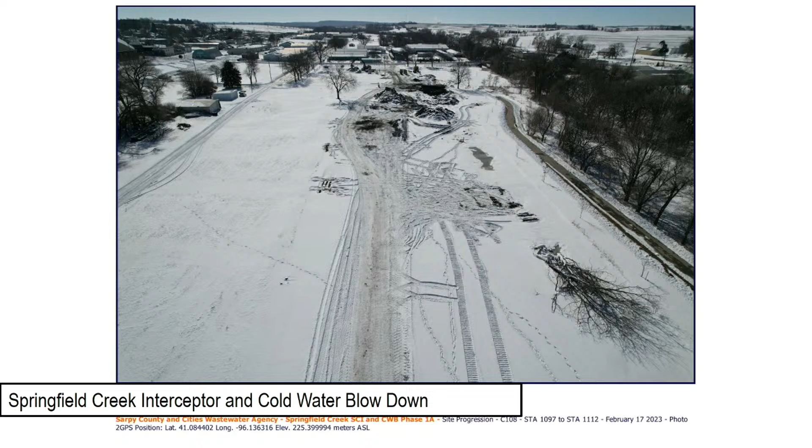As we move south, this is south of the buildings in the fairground.

The construction here isn't necessarily complete. They have some of the line work in, but they're working from the wastewater treatment plant facility north to try to make a connection where 2 crews will tie in at roughly this location at the tractor pull area at the Sarpy County Fairgrounds.

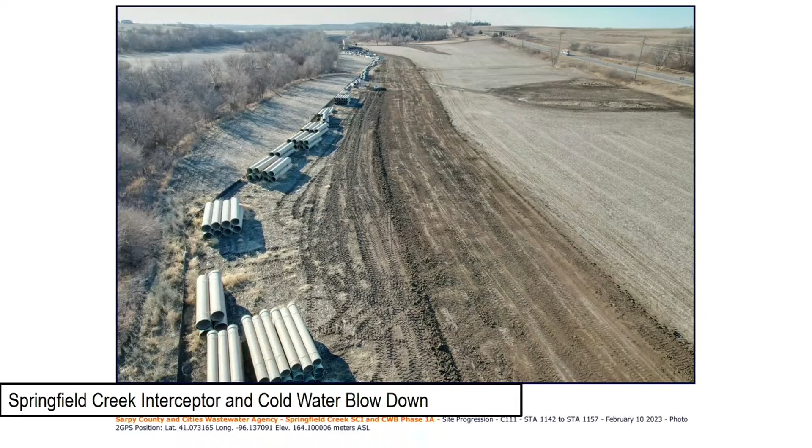This is at Flug Road, looking south towards the wastewater treatment plant facility. These photos are as you work your way south towards the facility in the City of Springfield. The tub or tank, the earthen tank I talked about a little bit ago, is that big bowl or dish shape.

This area right here is the equalization basin. It's roughly 8 to 10 feet deep, and that will hold the cold water discharge before it ultimately, the cold water blowdown line discharge, until it cools enough that we can actually discharge it to the creek.

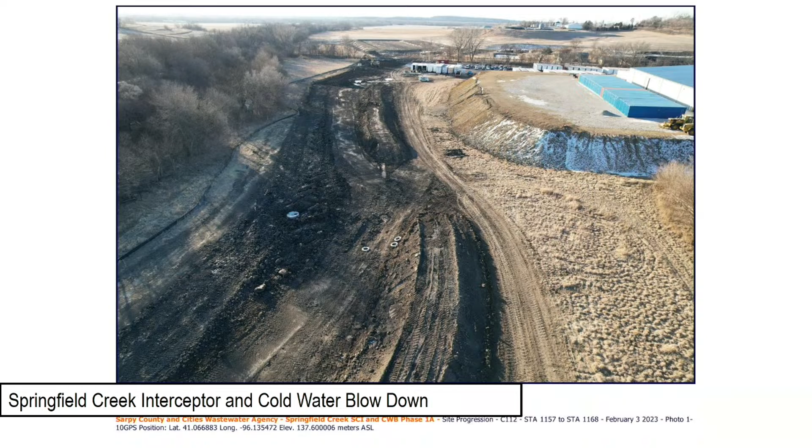Moving on from segment 1, looking at Zwiebel Creek subbasin, and then the lift station property. What you see here on the right-hand side of the page is the actual lift station site that this application is referencing. The wet well has been cast in place, and several of the manholes, vaults, and meter structures have been installed as well.

Just rotating around the site a little bit to give you some perspective of the size and scope of the project when we get to the site plan references a little bit later. This just rotates you around from south to north of the lift station site.

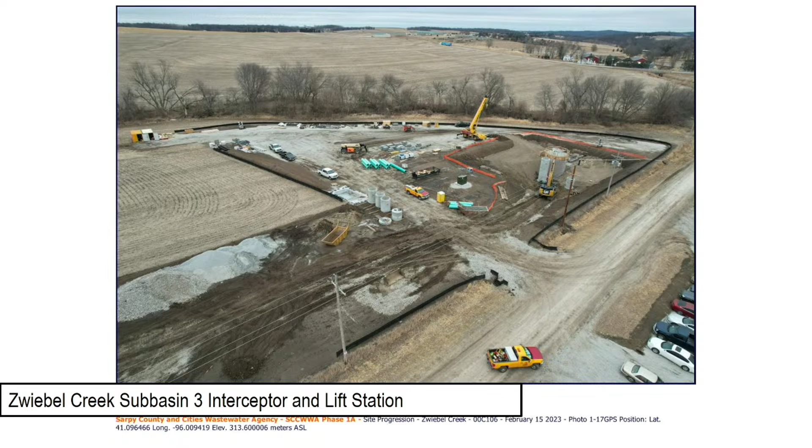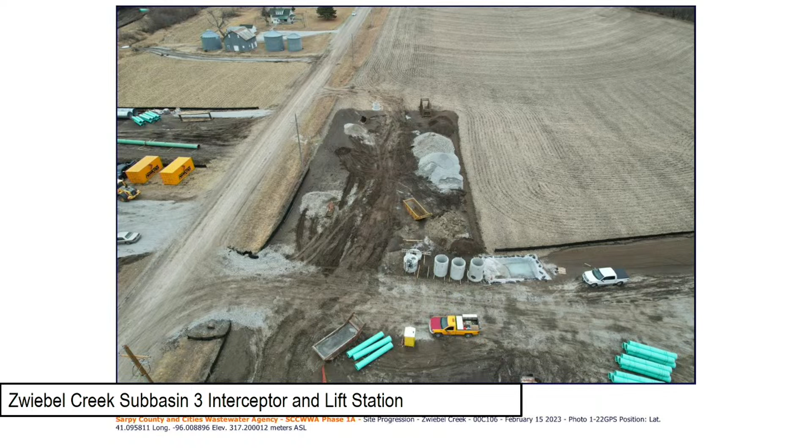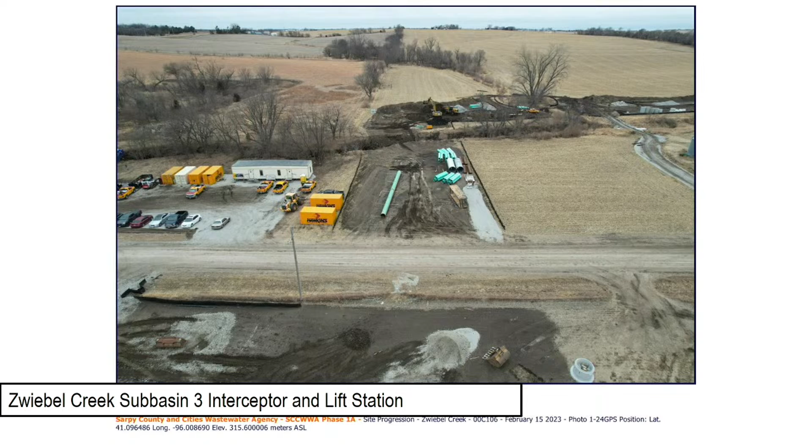If we start chasing the alignment from there, this is basically sitting right over the top of the wet well at the lift station, looking straight north, due north, with 63rd Street on the left-hand side of the page. We're moving north and then pointing straight west towards an alignment change. Once we get across the creek, we start heading due north again, continuing that gravity line all the way up that watershed, parallel to the existing creek line that runs through there.

Most of the sewer line from basically this driveway all the way up to 72nd Street is installed. It's been tested and has passed the testing. They're working back, 2 crews, one working south, one working north and west, to meet up and conjoin there.

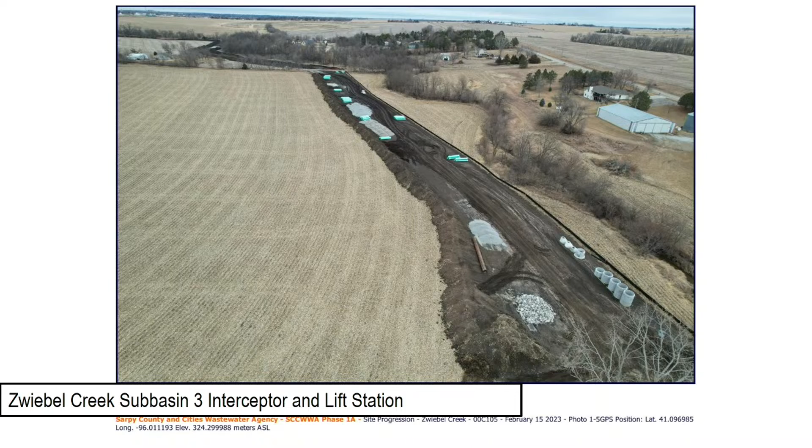Moving on to segment 3 and 4. The eastern portion of the project is what we're calling Zwiebel Creek, segment 3 and segment 4, trying to get that all complete by the end of 2023 and in service so that the development being planned in Papillion would be able to potentially utilize that sooner rather than later.

So just some photos going through segment 3. This intersection is Highway 34 and Harlan Lewis Road. The Omaha wastewater treatment plant facility is actually located in the background here. West Papio Creek is where we would tie in, just on the other side of the creek.

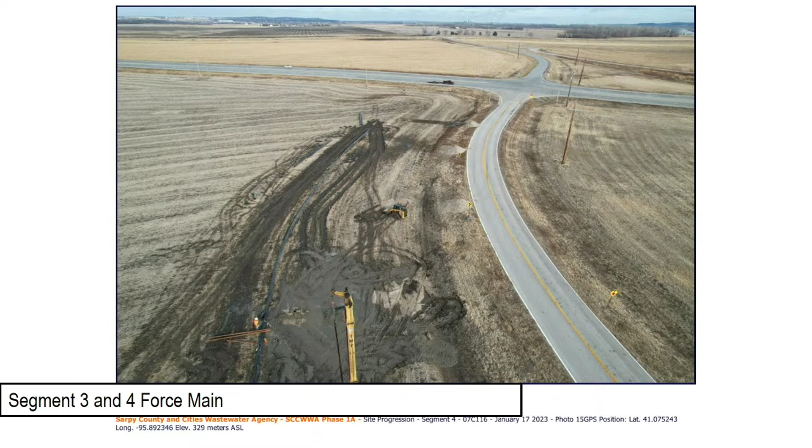What you're seeing here is a lot of dewatering wells that have been installed. This is down in a really low-lying area along the Missouri River with a lot of high groundwater, and that needs to be drawn down in order to expedite construction.

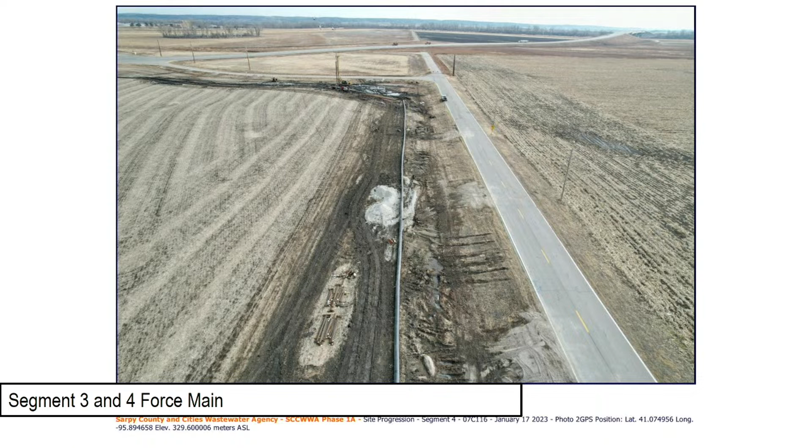This is La Platte Road looking basically straight east. Really what you're seeing here is just the installation of some of those dewatering wells. They haven't started the physical pipe construction here. They do have pipes strung out, and they're starting to fuse some of it, but they haven't started the actual digging and installation of that system yet.

Highway 75 and Highway 34, with 34 in the background here and 75 going north. You can see all the pipe that they have laid out and strung at basically Pinecrest Drive along 10th Street. That pipe will ultimately extend and be bored under the highway, basically paralleling La Platte Road all the way down to Harlan Lewis and then north.

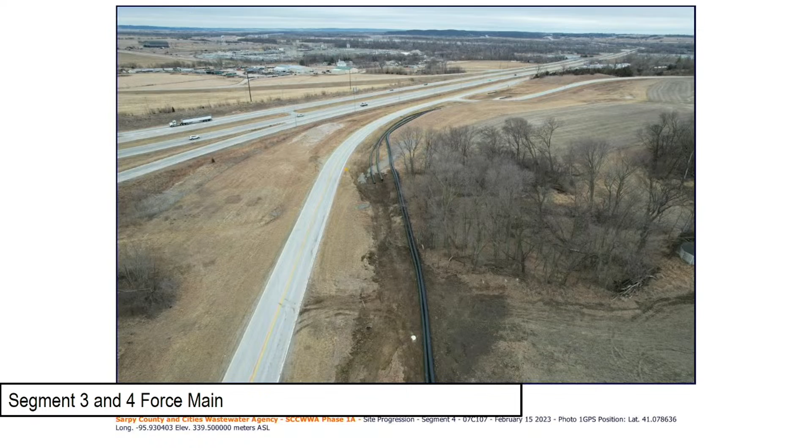From this location, it heads pretty much due north, and you can see the amount of pipe they've got strung out and fused together. They are digging and installing some of that as they go. This is the intersection at Hidden Valley, or Platteview Road more or less, and 10th Street, looking straight south.

This is looking due east on Platteview Road. The intersection of 10th Street and Platteview Road is right here, or Hidden Valley, I guess is what it's technically called.

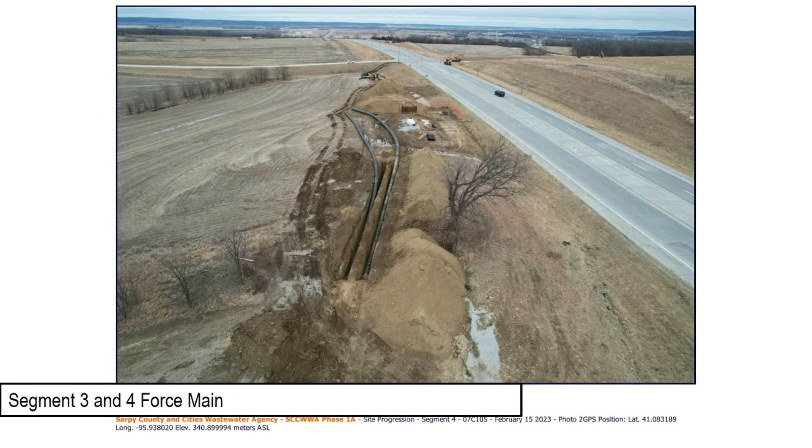You can see the pipe and the installation of that pipe basically stopping right here for the time being. They have everything from about 40th Street, 42nd Street installed all the way up to this point currently, and they're continuing to work down 10th Street and then down the Platte. This just shows some of the pipe that was strung out along the Platteview Road around 42nd Street.

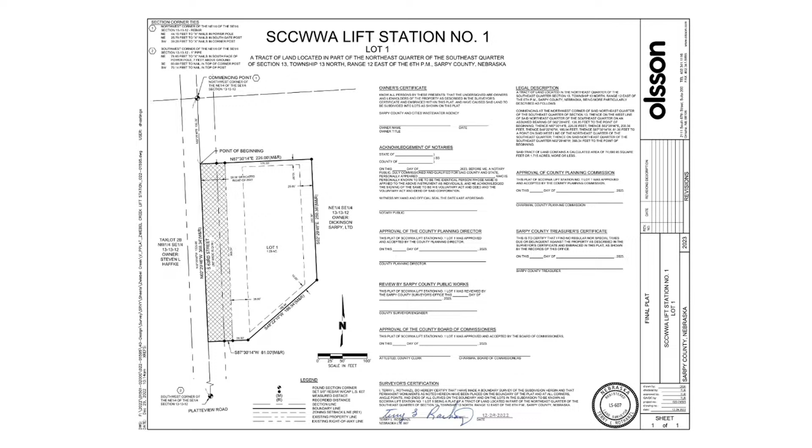To get into the nuts and bolts of why we're here today, the Sarpy County and Cities Wastewater Agency did buy and fee simple title a couple tracts for the lift station locations in order to be diligent and require of ourselves what we would expect of the development community. We approached the planning department to plat this property, change the zone in accordance with the comprehensive plan, and follow all the rules and regulations, pay all the ASIP fees and all the fees associated with that. So this is the location at Zweibel Creek, the 63rd and Platteview Road location.

Everybody always asks, what are we going to see out here? What you're seeing right now, obviously, is exposed concrete foundations of the wet wells, but that will all be underground once they get things backfilled. The structure here is the wet well below grade. The manholes are all below grade. The valve vault's below grade, as well as the distribution manhole.

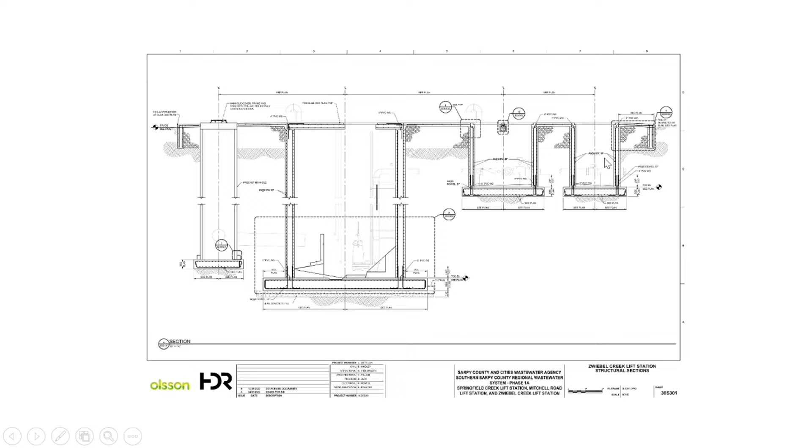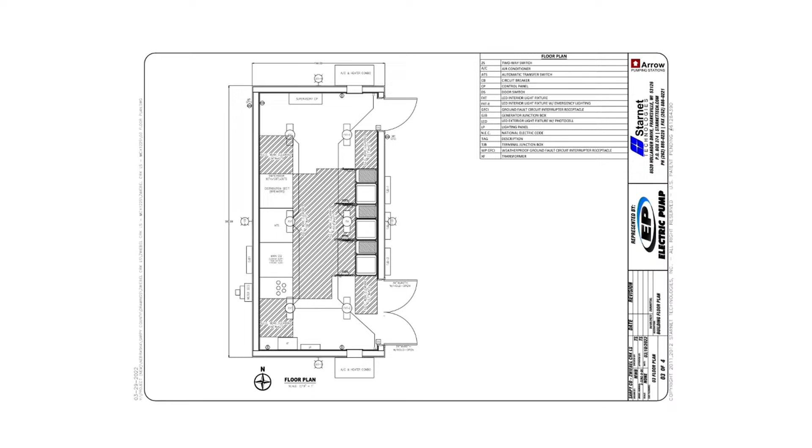That is basically the footprint of the electrical building. It's all prefabricated in a controlled environment, fully tested. The electronics and electrical systems controls are all fully tested in a controlled environment before they send it out to the site. And then once it hits the site, the contractor is responsible for building a foundation and then setting that with a crane system, and then tying the foundation to the building itself.

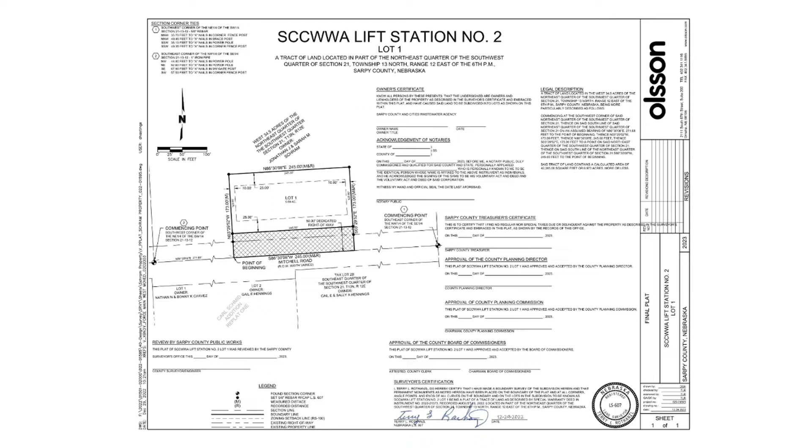So I guess with that, I'd be happy to answer any questions as it relates to this first plat application.

Thank you, Mr. Thompson. I guess why don't we go ahead and open this first application up for public hearing. Anyone here this evening have questions on this application or comments in favor or opposed? You can come forward and state your name for the record. Going once, going twice, they're just here to learn, okay? I hereby close the public hearing.

What are the wishes of the commission? We'll basically have three different motions we'll need for this application, one for the rezoning, one for the preliminary plat, one for the final plat. Again, if there's no discussion, I'd entertain a motion.

I'll make a motion then. I'd like to recommend approval, change the zoning from AG agricultural to RE1 residential estate 1 for proposed subdivision to be known as Lot 1, SCC WWA Lift Station Number 1, subject to the comments found in the staff report. Make the recommendation as the proposal is consistent with the Sarpy County Comp Plan and complies with the requirements of the Sarpy County zoning regulations.

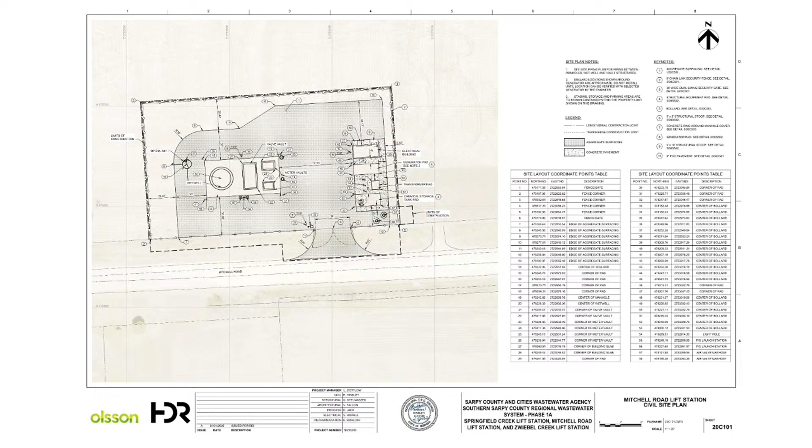Very similar layout to what you've seen before, exactly the same building materials as I showed in the previous palettes and building footprints, just a little bit different configuration of the property there. This site is not currently under construction. We're still working through a water infrastructure loan with the federal government to be able to start construction on this site. So we're trying to be ahead of the ball on this one here a little bit. With that, I'd be happy to answer any questions you might have.

Okay, thank you, Mr. Thompson. At this time, we'll open this matter for public hearing. Anyone here have questions on this application, here to testify in favor of or opposed to? Now would be the time to come forward. Seeing no one, I hereby close the public hearing. What are the wishes of the commission?

And we would also have 3 different votes we would make on this, one for rezoning, one for preliminary plat, one for final plat.

I would move to recommend approval of the change of zone from AG Agricultural Farming District to RS 100 Single Family Residential District for a proposed subdivision to be known as Lot 1, SCC WWA Lift Station Number 2, subject to the comments found in the staff report and the attachments, and I make this recommendation as the proposal is consistent with the Sarpy County Comprehensive Plan and complies with the requirements of the Sarpy County zoning regulations.

I will second. Motion by Mr. Preston, second by Ms. Cheney. Any discussion or questions? Hearing none, please vote.

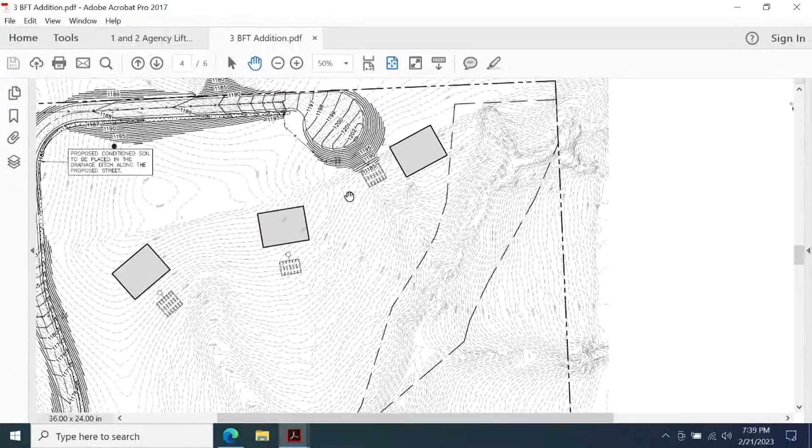Thank you. I have a quick question. The cul-de-sac length, is that all the way going up the west boundary and then turning back to the east, or just from the northwest corner back to the east? Since there's no intersecting street with it, the cul-de-sac would be the entire length of the road.

Okay, so it's all the way from the southwest corner, from Sack Road? And then you mentioned a plan for connectivity down the road. Where would that be on the map? So the most likely spot for connection - I'll use this aerial - it depends on what develops, but I'd say the most likely is probably something to the west or to the northwest to get back to 204th Street.

As you can see on this site, it drops off considerably right along this area, and it's kind of a valley in here. So it's very difficult to have any kind of road back to Sack Road within the current limits of the property. It would most likely go to the west, back to Sack Road, or to 204th Street if that develops.

So the intent would be that when the surrounding property develops, it would not be along a cul-de-sac any longer? It would - yes, it would. That's a good way to state it, yeah.

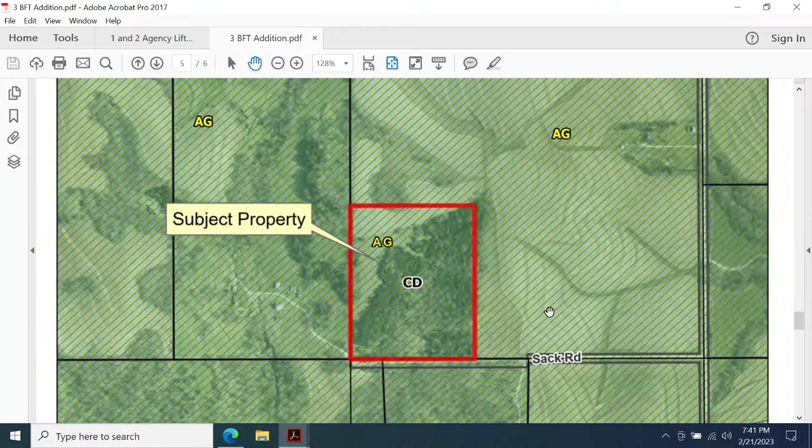One other question - I don't think that's a half-section line along the west edge of this property, is it? Is this a quarter section line, where 198th Street is? Good question, let me pull up the map here. Sorry, one second.

This would be the center section line because there's 192nd, there's 204th - that's a mile, right? Yes. So this is the property right here, and this is the southern - Sack Road is actually a section line. Okay, so 198th is the half-section line, apparently? Jason, just say yes. Yes.

198th, okay. You're talking about what would be potentially here, the west side, west edge of the plat? Yeah, it's like - yeah, okay. Yes, that'd be a half section line because that's right here.

Since we just had the Sarpy County and Cities Wastewater Agency in on the prior applications, is this also subject to paying fees for that? No, this falls outside of the growth management area for the agency. It's in the conservation development zone for our growth management areas, so that's why you have the 40% outlot for conservation development.

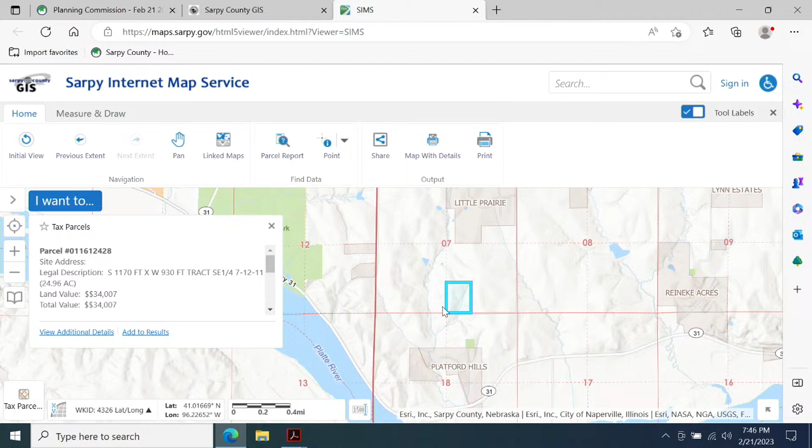Jason, can you pull up the other map for the audience and for us on our screens here? Zoom in here. Sure, try to get you. I might even throw on the... Okay, is that good? That's, yeah. And if you've got the mouse there, sir, you can probably move it around. So this is our family farm right here.

Okay, so Sack Road coming in here. I was just a little worried about that, that's my only access right there. So Sack Road kind of stops at my property. So coming in and out of there, I was just wondering where the driveway was gonna be and if there's any runoff concerns.

And where the houses would be at, I guess. Okay, because it looks like it's gonna run all along my east line, and just a little concerned with that. And with the septic, I didn't know there was gonna be septics, just a little concerned. That's my only way in and out, so.

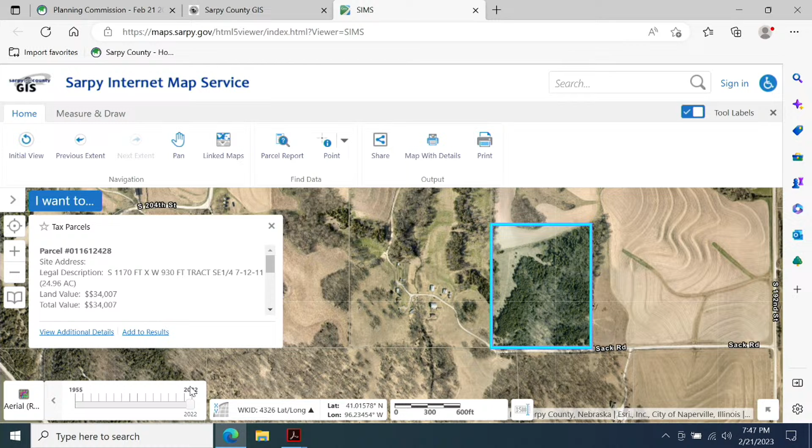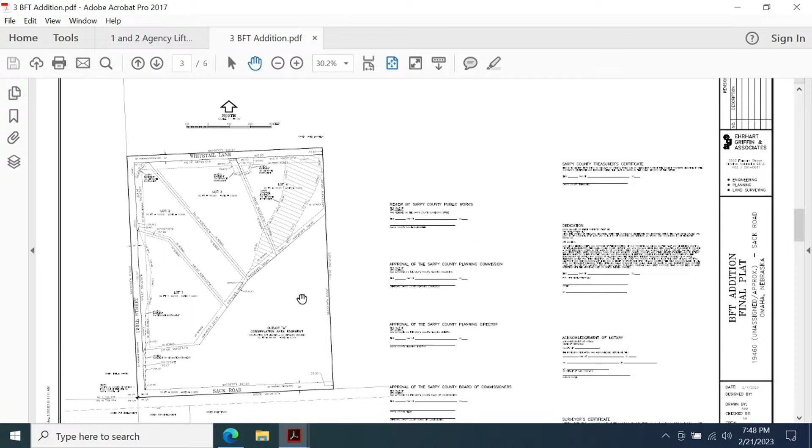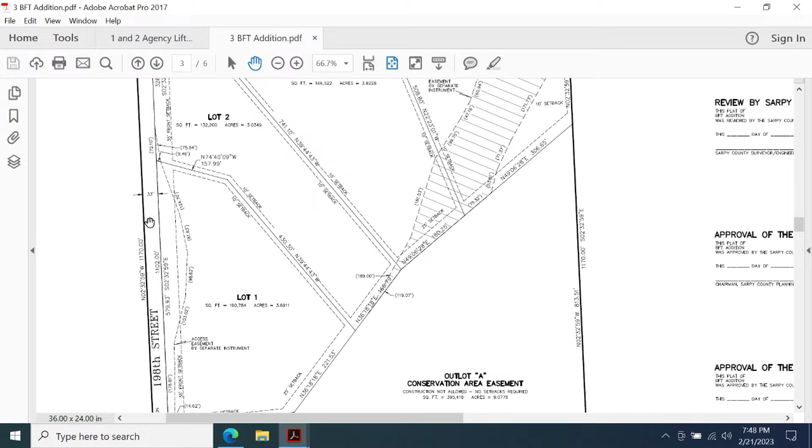I don't know if that map... Yeah, this map. So really, the road as built for this development will follow this dashed line. The right-of-way will be dedicated here, but because of the topography, the road itself, it doesn't make a lot of sense to build over some of the gullies and things that are out there. So it'll follow this dashed line, and in that corner it'll kind of round out here, and then that will be a portion of the roundabout there.

Something to add to that is that all of these roads will be built to county standards, so they'll have to be the correct width. There'll be a gravel road or a rock road then? Yeah, it'll be paved. Just a little concern with runoff towards my fence when we run cattle out there, and I didn't want to fix any washouts, I just concerned with that side, that was all.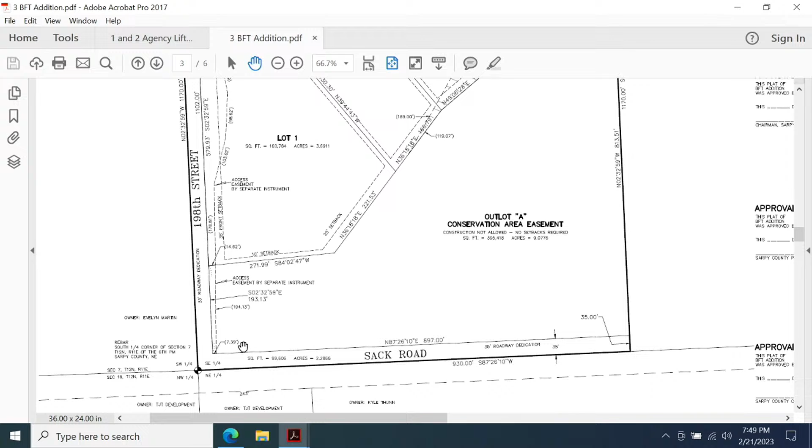I'm sure that's why the road's there, or their proposal, but I think that the septic systems will likely be in each house then, on the downhill side, most likely. And then that low spot right here in the middle, that kind of, I think that got repaired by the county a couple years ago, so.

That used to fill up pretty good there and wash out that road, so it's been a couple years that they've had it repaired on Sack Road there. That's my only concern, basically runoff, so I don't have to do any fence work.

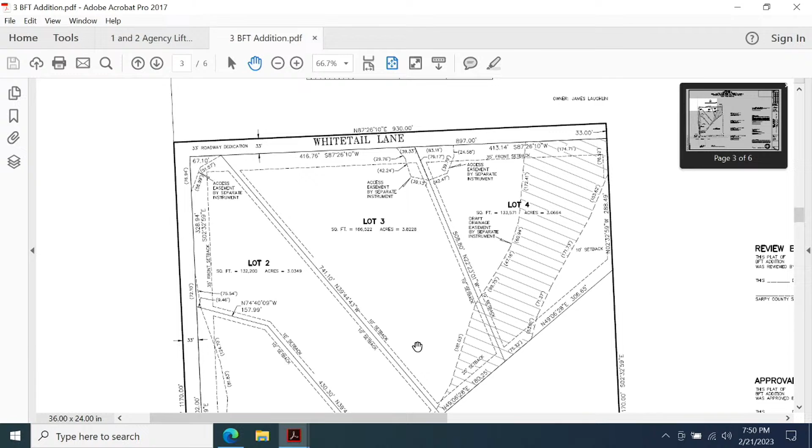And what about future developments? Yeah, the future development piece is where Mr. Kubitschek mentioned how this would have connectivity in the future if somebody developed the next section over, adding additional development to tie into the north side there. I guess the same would be true potentially if you developed your land at some point. Whitetail Lane might go west as well. Probably a long way in the future, but we try to figure out where the connectivity is.

Yeah, and my property over here on their west side, I'm in a conservation land trust, so I just want to make sure it stays the way it is. I was just curious on what was going on. Appreciate you coming out, thank you.

I was wondering if I can make it. Come on up, Mr. Morrison, if you want to speak in the mic so we can hear you.

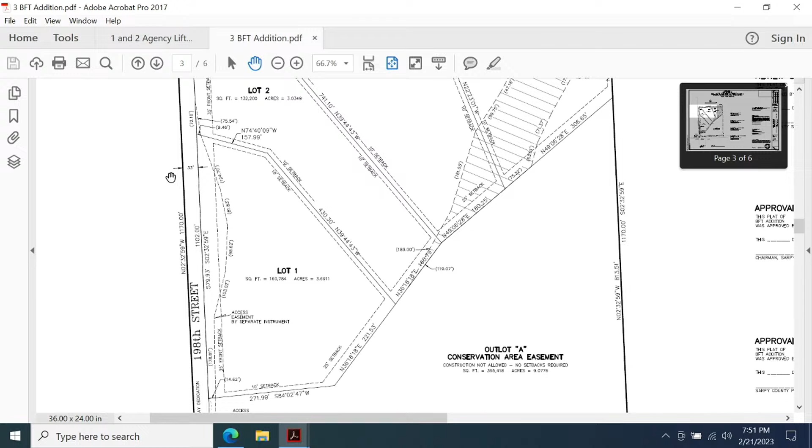Yeah, if I can find the grading plan, I can actually show where. I think it's page 4 or 5. There it was.

Okay, so the plan with the road is there's going to be roadside ditches along both sides of the road to pick up the runoff. The site has a high point here, and a little bit of this area does drain west. You can see there's a ridge line here, so from this area it drains west, but it'll be intercepted by the roadside ditches, which we will route down towards the existing drainage path. So we'll be intercepting runoff with the ditches, so we won't be contributing to runoff onto the adjacent property.

And everything where the houses are is on the east draining slope. Here's another ridge line, so this area is all draining down towards the drainage channel. These are just conceptual locations of the houses. Everything's going to be draining east and south, so it won't cause any additional runoff on the adjacent property.

So where that proposed road connects to Sack Road, right at the bottom down there, would there be a culvert or how are you going to run that? If it's cutting off drainage, yeah, we'll have to put a culvert through there, but the existing drainage goes down to that ditch and down to that culvert pipe there.

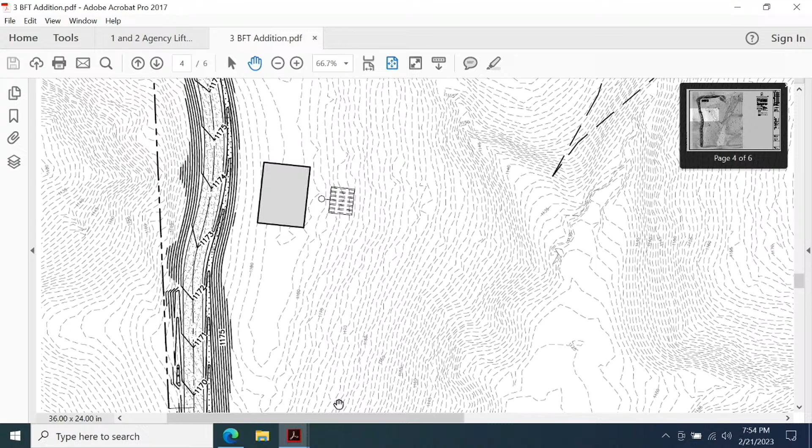But Mr. Gibson just told us that's in a conservation easement, so that's never going to get dedicated. Okay, yes. So for right now, this is providing access to these 4 properties, and this road, though it's partially within right-of-way and partially within private, it is granted egress, ingress to the properties, and so in essence, it is a public road.

We always require that the right-of-way be dedicated, regardless of what's happening on the other property. That's always been a requirement to pull that into this plat and platting process so we can have connectivity in the future. Whether or not that ever gets dedicated on that side, we may end up having to get extra right-of-way eventually, but at this point that's always been a requirement of platting per subdivision regulations. And that easement for the driveways to the public?

It should. We're still working on that easement. That'll be part of the subdivision agreement or the process of reviewing those documents. My understanding is that it will be a permanent access easement, which would be public potentially.

Do you have any experience with that, Julie, or can you speak to that any further? Good evening, Julie Ogden, JEO Consulting Group, consultant for the county.

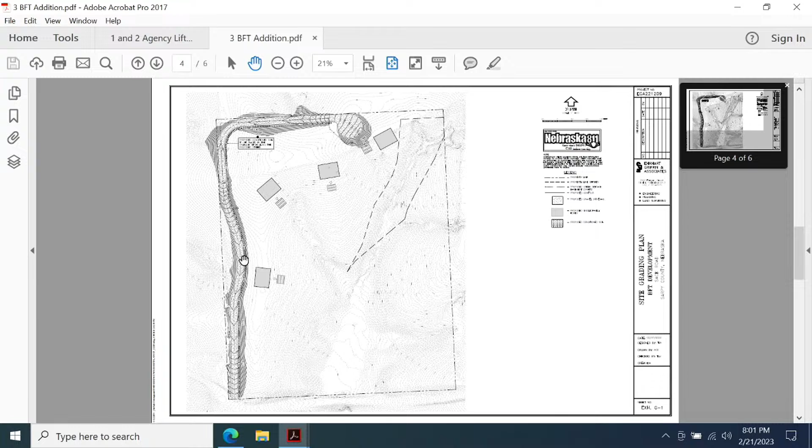Yeah, I've got something else I want to talk about with regard to the waiver for the individual septic and well. I have concerns. Our regulations are set saying that with 3 to 5 acre lots, you're supposed to have either community water or sewer.

And we're not doing that here. And I don't like to set a precedent. I know there's other developments that are occurring in that area, and it's going to come up again. And I'm sure that if somebody sees that we're doing it here, they're going to ask that we do it on the next one.

So I ran some numbers on this today, and I wondered if there was any consideration given to the fact that I understand that the well and septic is probably necessary up here because of the topography and the conservation area or whatnot. But with well and septic, you need to have a minimum of 5 acres.

So why couldn't we just have 3 5-acre lots up here instead of the 4 3-acre lots that we've got over here? I did the numbers on this, and it looked like with the 40% that's put aside, we end up 2,100 short on the 40%, and the rest of the 3 lots are all 5-acre lots, and they comply with individual well and septic as far as size.

So you're proposing to change and add additional? No, I'm not proposing anybody change. Was that considered? I mean, that's an alternative as opposed to setting a precedent with accepting waivers, to say, hey, that's what the rules say. You can build here, but you can only fit 3 lots in here, not 4.